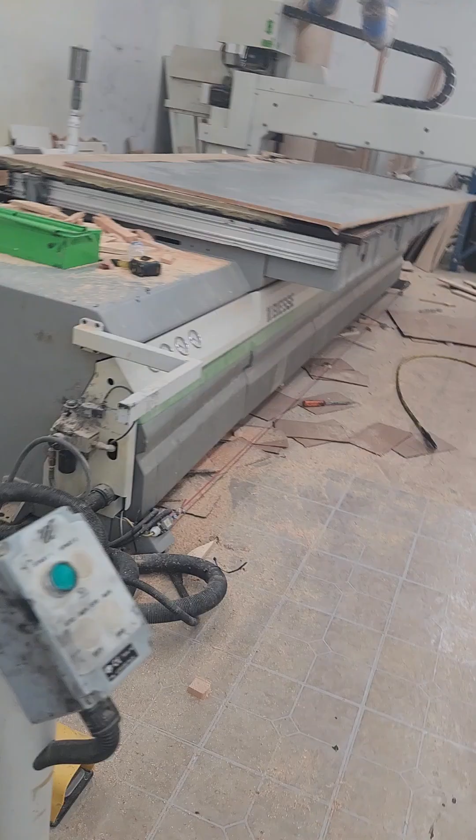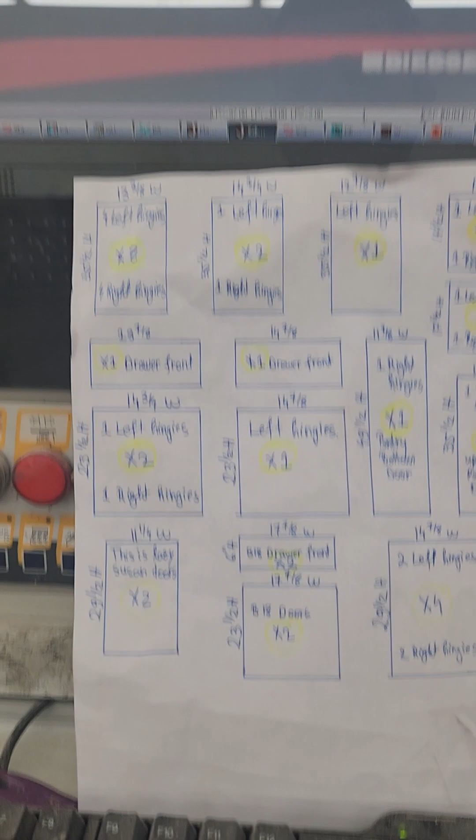If you have a machine like this one, I don't know the brand that you have, but I have a Biesse Rover B. As you can see over here, I'm gonna do a couple of tutorials on how to work with the BiesseWorks program. Now they have a new version, which I think is bSuite, but we're gonna be using BiesseWorks. I like this one better than the other one.

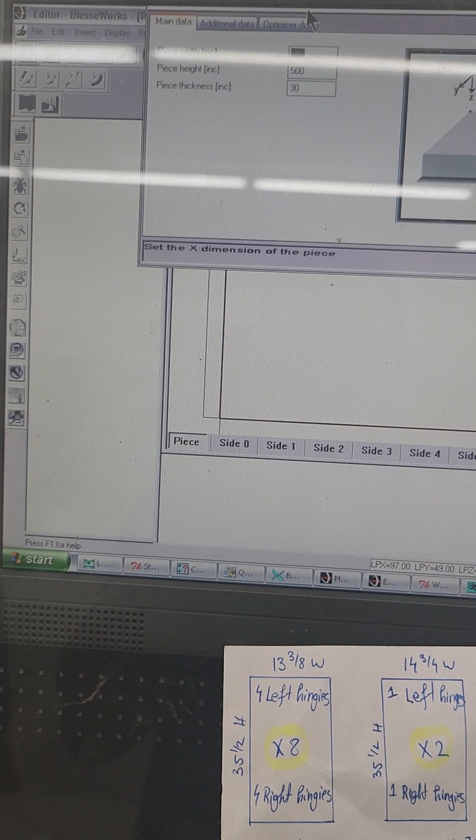So let's do, for example, two pieces. I had this piece 14 3/4 by 35 and a half. The first thing to do is go to a new one, so it's gonna show you the piece data.

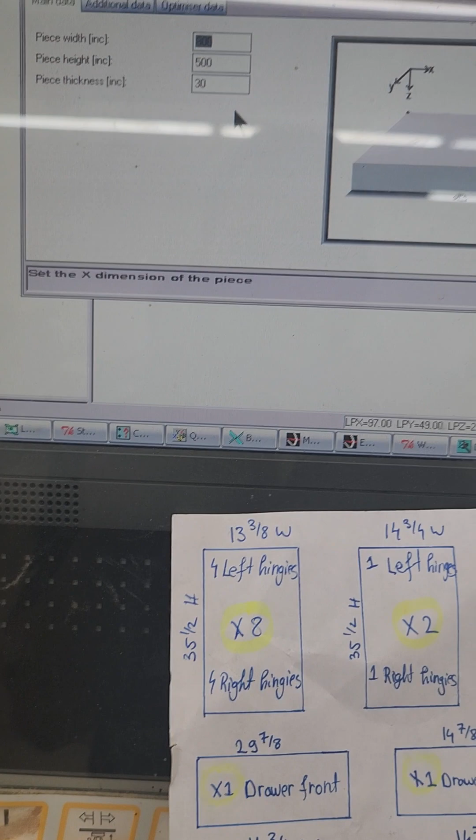On the information, it's asking me in inches to put the information that I want. Since these are doors, I want the length to be on the x-axis and the height to be on the y-axis. Okay, so let's do this.

So I have 35.5, and then over here I want 14.75, and then the material thickness.

If you have a material like this one, let's say this is 3/4, but it's not exactly 3/4, it's like 0.7. But I'm just gonna assume that it's 3/4 since I'm gonna be cutting through. So I'm just gonna put 0.75, or you can just put the real number, 0.7. You can always check with the caliper what's the measurement of yours.

So 0.7. Now I do have a program, which is my piece that I want to cut, this one. So now what I'm going to do is just go here to milling, and then I'm gonna go to milling again.

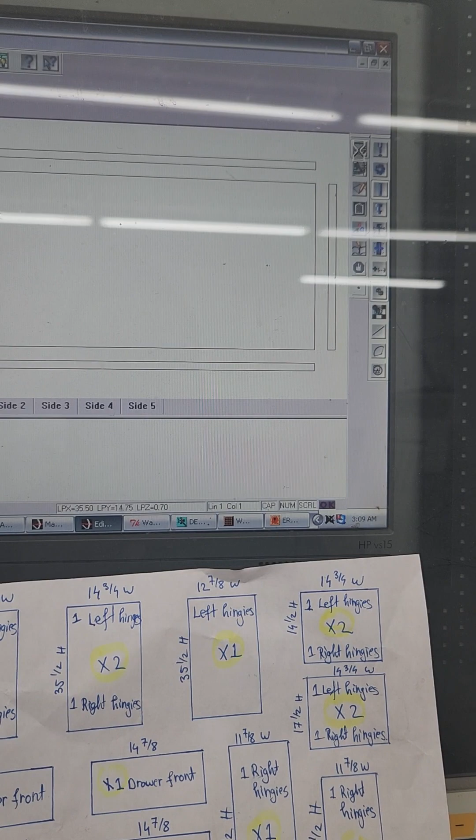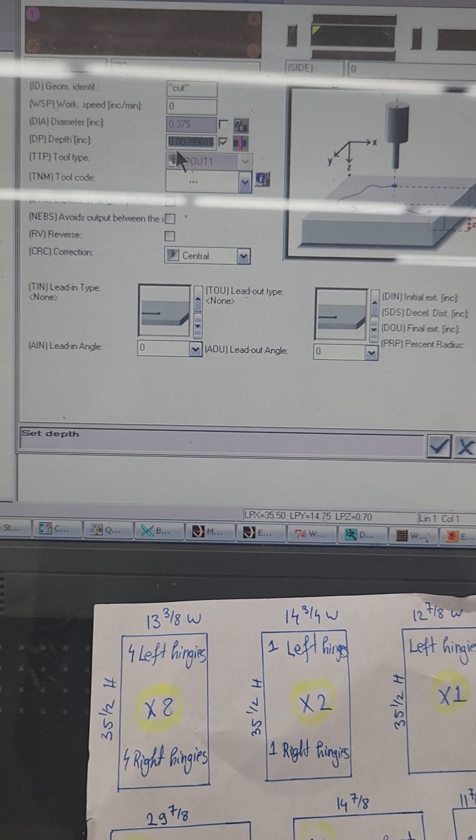The next thing to do is just put a name on the piece, which is the name it's gonna be cutting. So I'm just gonna put 'cut', and on diameter we're just gonna unselect this one, and on depth we're gonna unselect it and then select it. I just want it to go through the measurements that it has on default on the machining.

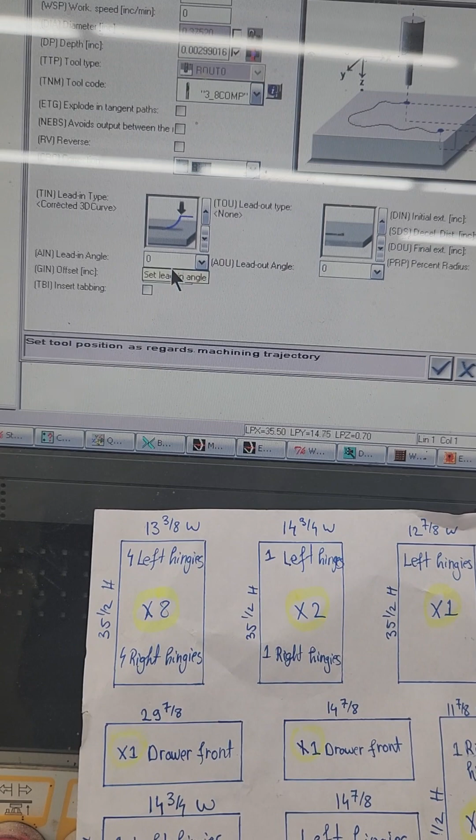So then I'm just gonna grab my 3/8 compression, and instead I'm gonna put over here on the correction, the right, and lead type correct 3D curve 45. Over here as well, correct 3D curve 45.

Initial extension I always like to put, let's say for example 2 inches, and the final 2 inches as well. And then additional data, vertical run, let's put 3.

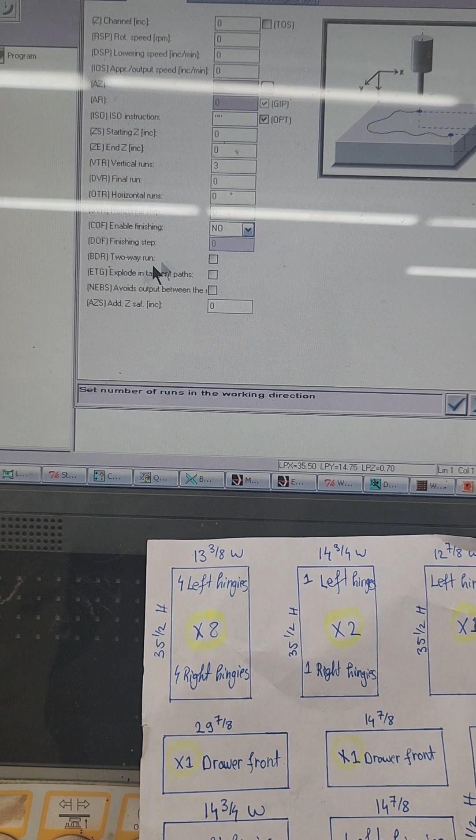If you want, you can always put avoid output between the vertical runs. This one is gonna allow the bit, so when it goes, let's say that the bit is over here, goes around, instead of the machine going up and then trying to run again, the first time that it runs, it's gonna go, and then instead of the machine going up, it's gonna go down and continue running. So that's the meaning of that. So you can put this, but I'm just gonna unselect it, or let's leave it like that.

Okay, so I put vertical run 3, and you gotta make sure that the diameter of your tool and the up cut and down cut matches. Let's say my down cut is only 1/8. Since the material is 3/4, if I go 3 times through the material, it's gonna cut a little bit the first time, go a little bit deeper the second time, and then the third time it's gonna go through the material.

But the first time that it's cutting, if the thickness you want to cut is something like this, on the first time 1/4 is gonna cut, and you have a down flute of 1/4, then it's not going to... it's gonna, how do I say this, it's gonna chip on your material.

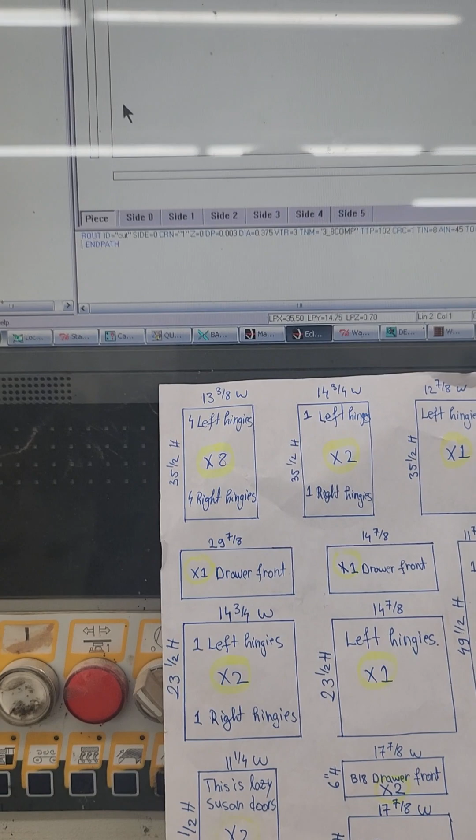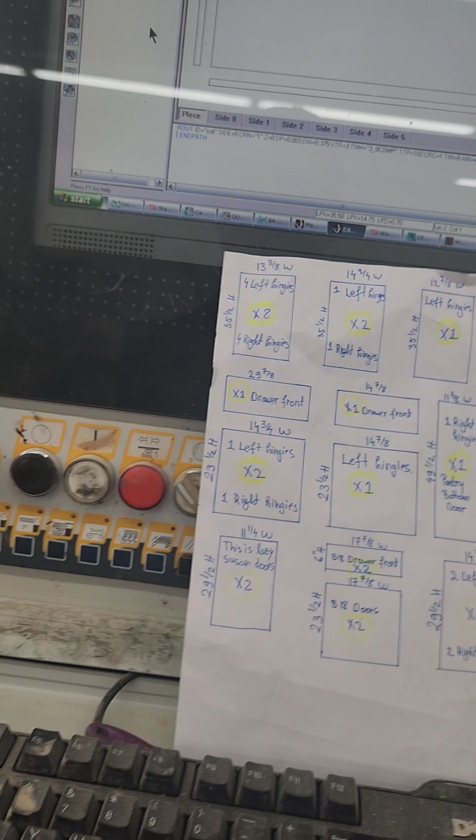The material is going to chip because you're using the down flute to cut on the upper, so that's not good. Which means you've got to always make sure your down cut is 1/8, or if you're using 1/4, make sure it goes through more than 1/4. I think that's a valid explanation. If you don't understand, I'll make another video explaining what I mean.

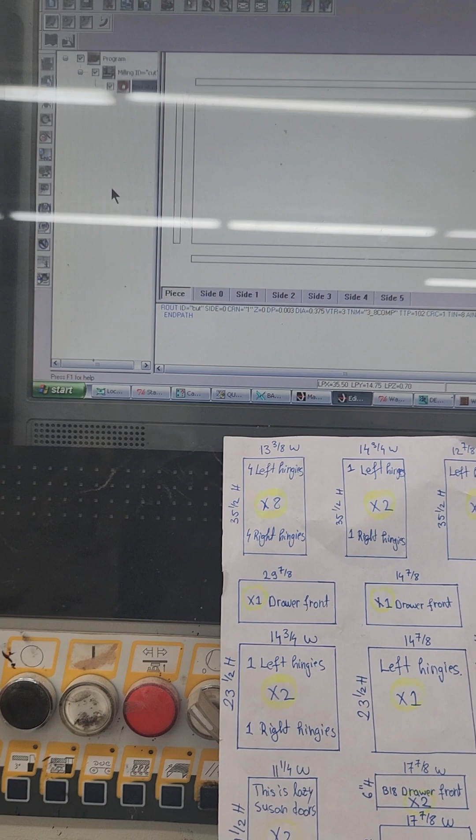So now what else do I have to do? I already have this, but now we're gonna go to figure, and then we're gonna go to rectangle. This is the easiest way to do a program.

Over here it's asking me center, I'm gonna put corner. On the x-axis and y-axis, I'll leave it like that. Corner x-axis and corner y-axis 0, 0, that's fine. And over here on the length, I'm just gonna put LPX.

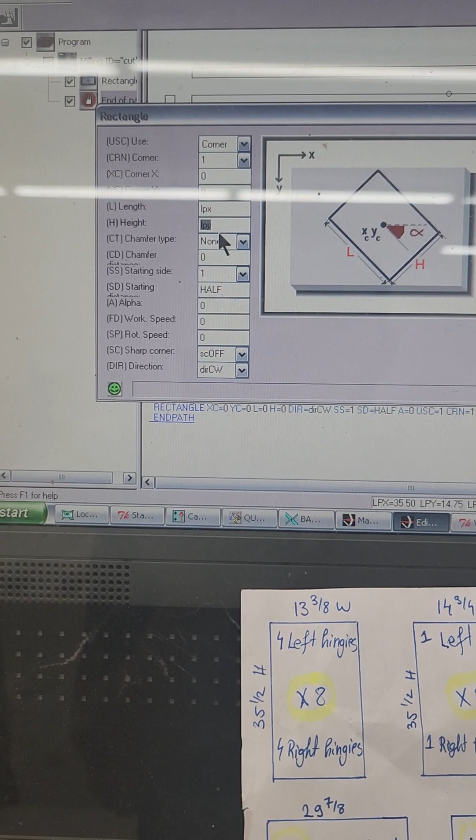The length of the piece on the x-axis, the length of the piece that we put over here. Over here, LPY, length of the piece on the y-axis. So we have LPX, length of the piece on the x-axis, and LPY, length of the piece on the y-axis. So then we click OK.

As you can see, we have the program now set up. So right now what I did, I selected these three. So let's unselect this. You have the piece already that is gonna cut, but now I want to see the tool path. It's going through the outside, which is correct.

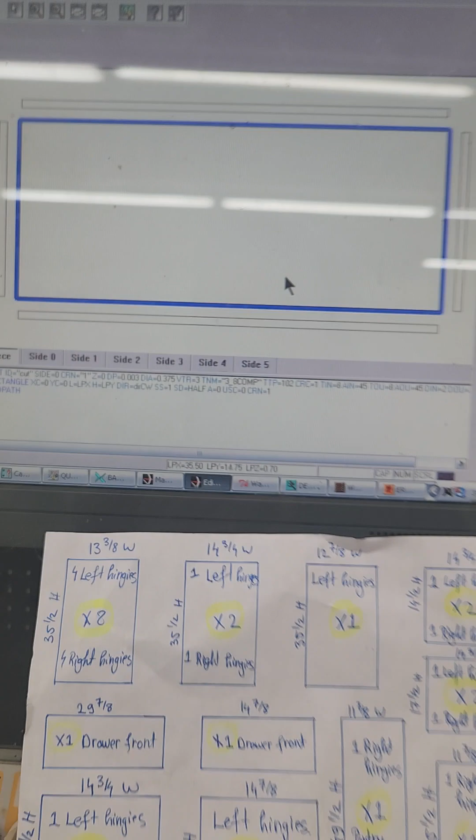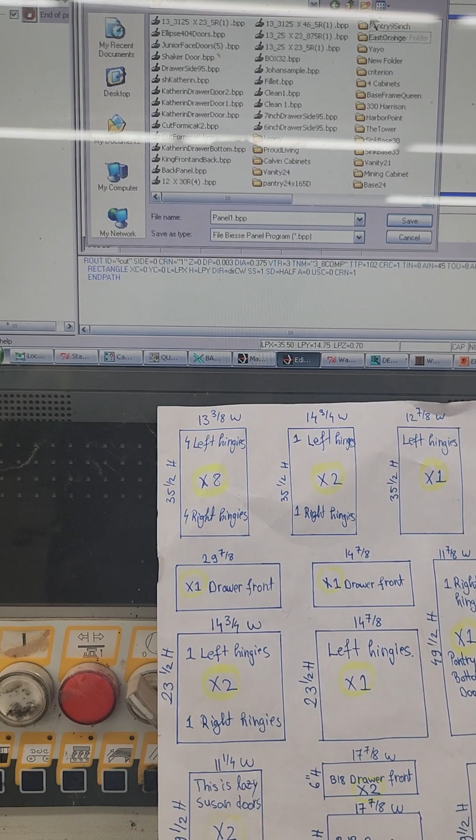And then I want to see a little bit more, I want to see the tool passing through. So the blue line is the tool passing through the outside, which is correct. So then what you do is just save, and I always like to save my program into my programs, installing, and then I'm gonna put testing.

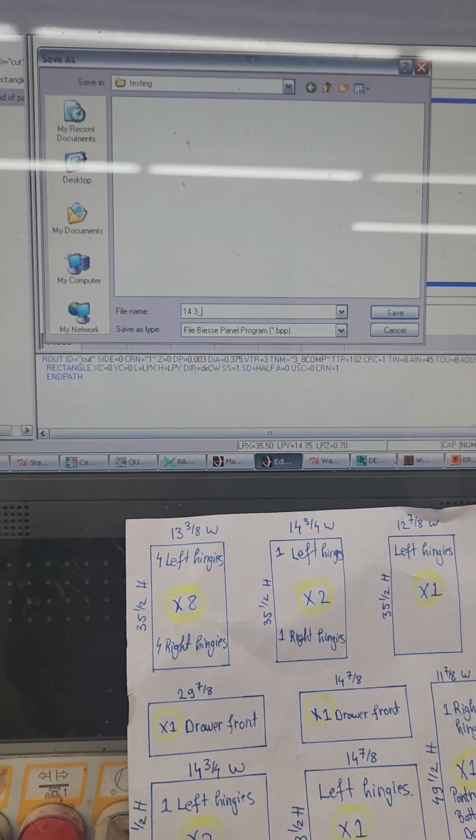And that's how you do the program. Now you don't have to do it over and over again to make the other programs, because if you have to go through all this list, man, you're gonna have a hard time, and probably you're gonna mess it up in one of them.

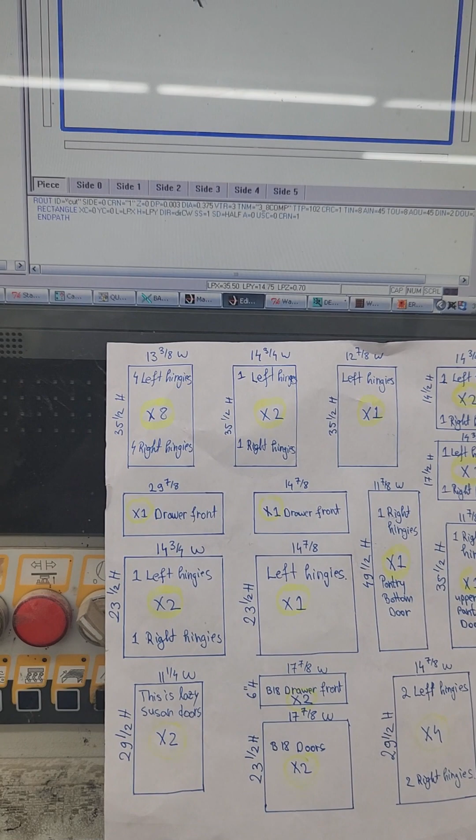So it's always good to have something to get as a reference and work from there. So what I do after this, I just use this as my main program, and wherever I want to make a change, I make the change on the P program, on the piece data, piece variable.

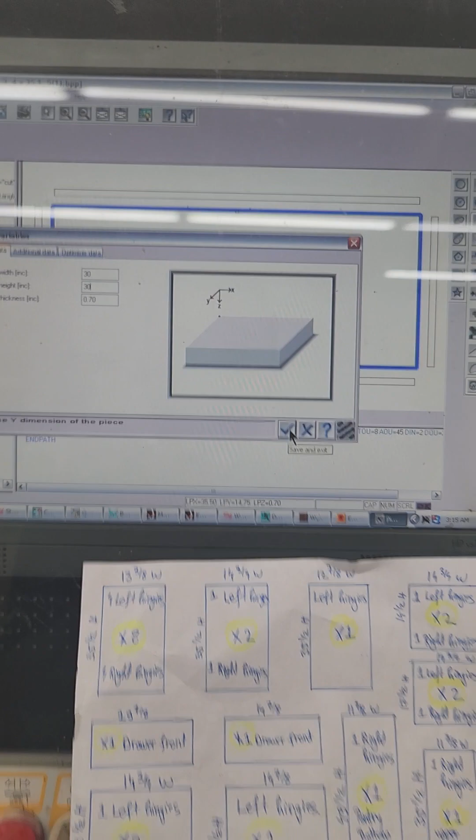So let's say if I change the dimension over here, what's gonna happen? So we have 30 inches by 30 inches. Now look what's gonna happen on the program. Let me zoom out a little bit, and when I click OK, the program changes itself, because what we put here is 2 variables, LPX by LPY. So the machine knows that LPX is the length of the piece on the x-axis, and LPY is the length of the piece on the y-axis.

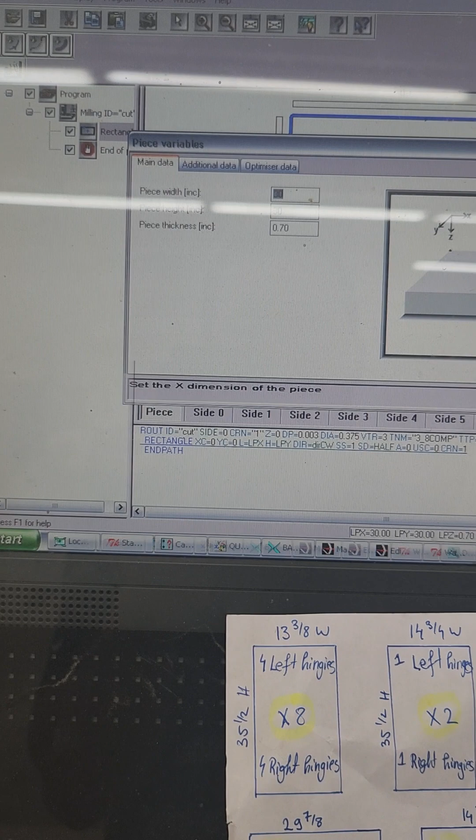So that's why whenever we're changing the piece variable, it's gonna change the piece itself automatically. That's a good way to use the program and make all your adjustments, and then you can make all these pieces. So then I'm gonna make another video showing you how to do the nesting and cutting the material. Thank you.